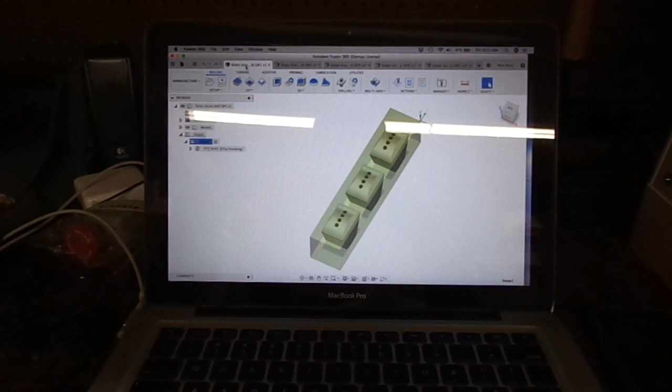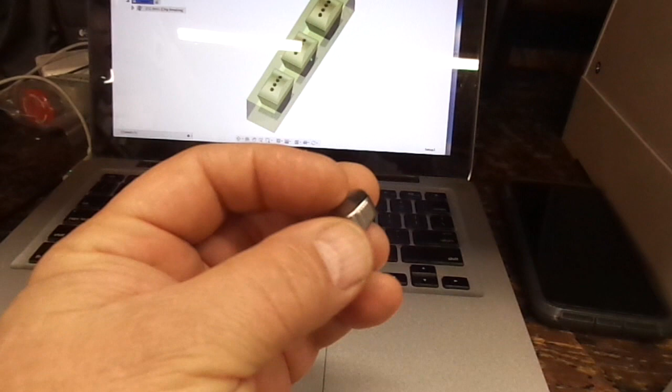So today's little project is going to be some air conditioning control knobs for the 67, 68 Camaro. And the problem is the customer wants to nickel them, and these are plastic, and even the reproductions that you buy are all plastic. So for nickeling you really need the metal knobs.

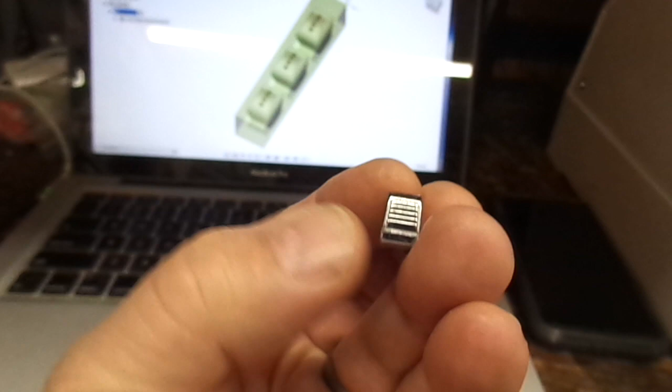So we don't have to replicate exactly what we see here, just pretty much, because there's a few angles that would be kind of time consuming. We're not going to do this little facet here, and this is at a slight angle side to side, and we're not going to cut that. It's just going to be straight perpendicular to the back.

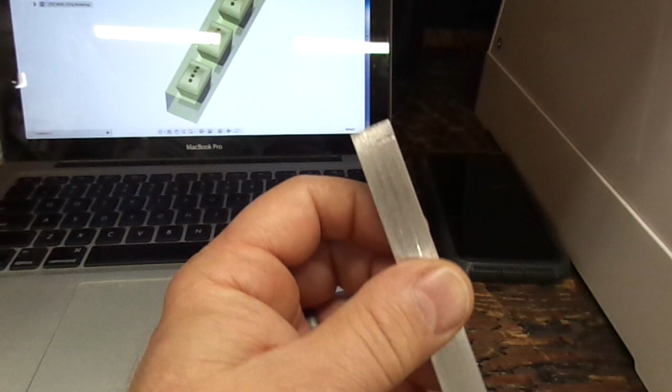So the material here is 6061 cut half by half. It's actually 500 by 510 by 4 inches.

And then on the computer, hey, there's my puppy over here.

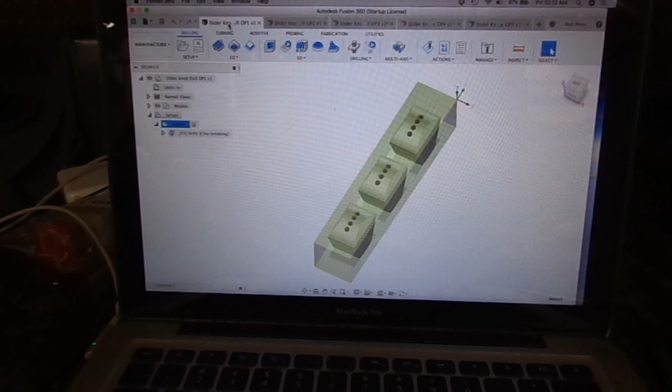And on the computer is our ops. So this is our first op. Let me get this glare out of here. Our first op is to pre-drill the holes for slotting, because they're like 3/8 deep, and clearing chips out of it's really hard. So we're going to do the pre-drill. That's a 1/16 drill bit, 4 holes in each part.

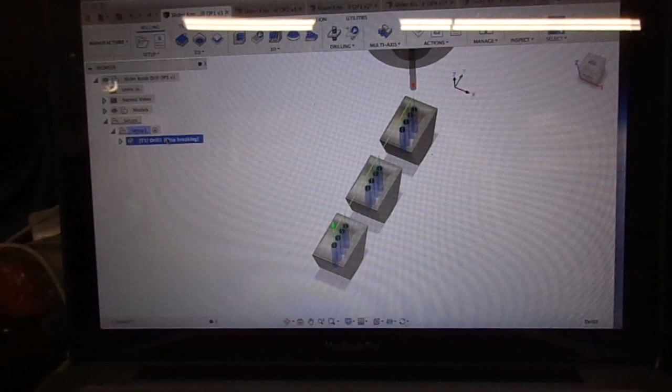And we'll go to the next op, and then these are slots, and I did multiple operations so that it would retract and go to the next one while I could blow the chips out of each one. And I've already ran this on a test piece and it works good. So there's our different slots. It goes in just a few thou at a time.

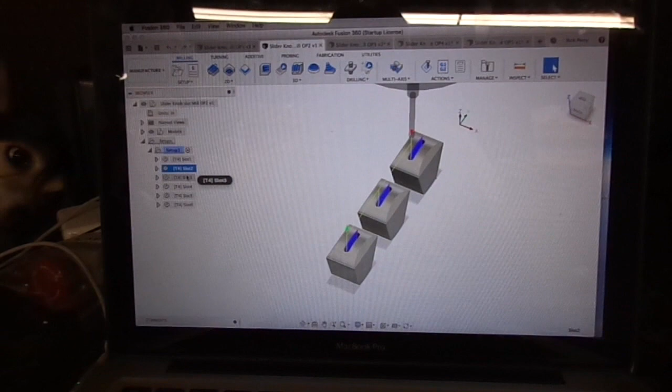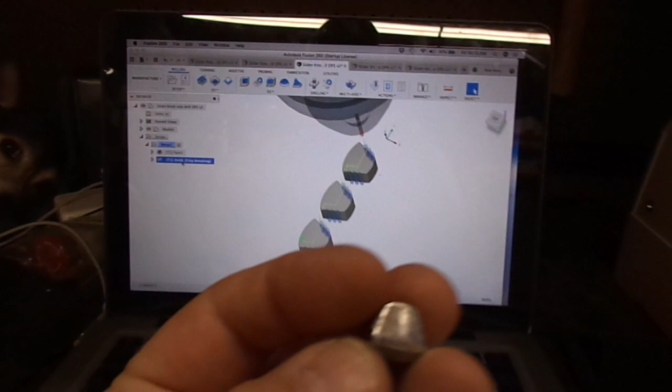Okay, so the next op is we're going to face off the top of this, which gets rid of the bulk of the material, and then we're going to come in and drill for these little features, which are sort of on the side here, but these protrude out. I'm just going to cut it in. It'll just be a little bit easier for us there.

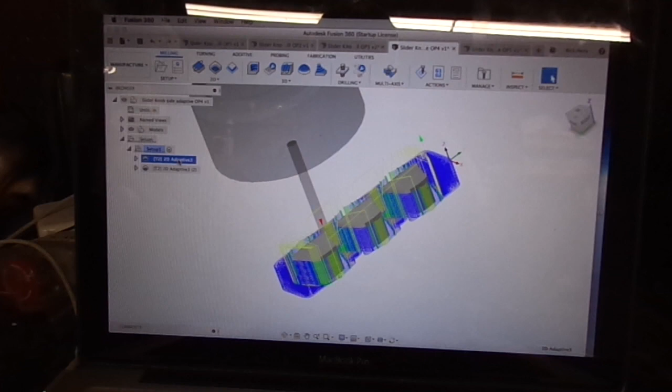And then op 4 is the adaptive. And the reason I did an adaptive is contours are kind of rough because of chip evacuation being that thick. And then we're going to do a soft jaw to separate the pieces from the stock. So then here's a last adaptive. This is like a 5 thou cleanup pass.

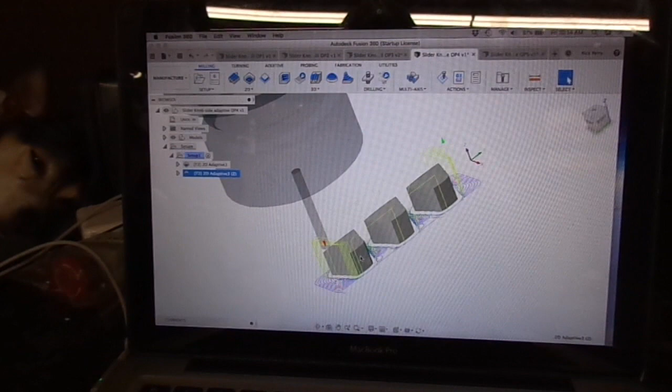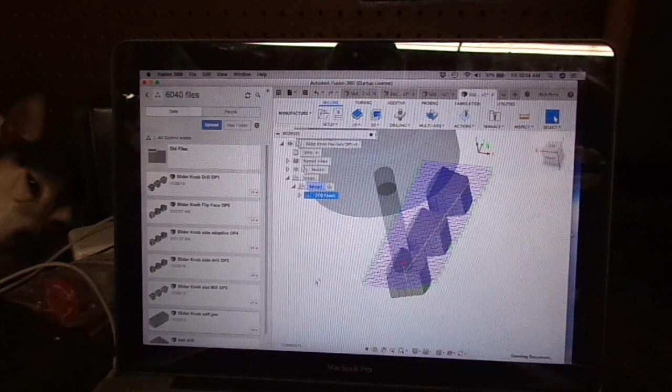And then this is the part flipped, and this is what goes in the soft jaw, and we'll face off the top. When we get the top faced off, the 3 pieces will be captured in the soft jaw. And I have the soft jaw modeled, but I haven't cut it yet. So the soft jaws that I've got in the vise right now will actually be sacrificed into making these. So in between op 3 and 4 we'll cut these.

Alright, so let me show you the vise and the setup. So here's our vise that I showed on my channel, and I bought some material and machined my own soft jaws. They had this material, but I went ahead and machined my own. So the piece is going to go in here with its 500 by 510. The 510 is going to be pointing up.

Just use a piece of aluminum here to lay against it to put the material against, because I have to flip it between the slots and the profile. So that's not a problem. And we'll get it all tightened down, get the bit in it, get the camera set up on the tripod, and we'll make some chips.

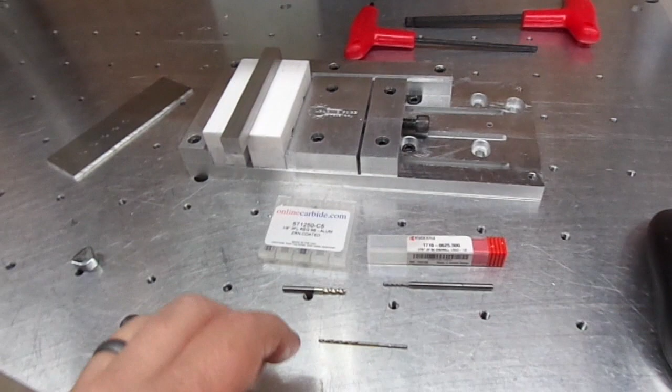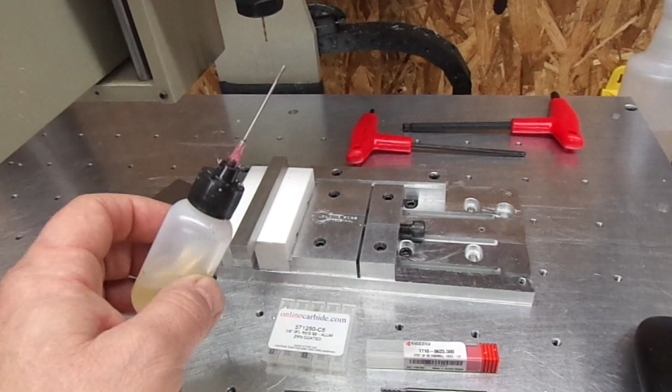So I want to go over the tooling that I'm going to do this with. The 1/16 hole is a Harbor Freight cheap, I forget what this coating is, but anyway, it's the Harbor Freight cheap bits that you get a pack of 10. These ended up being the best bits for drilling these holes, because I have to drill really deep in here, and you'll see when I'm drilling I'm actually going to use the little dropper to apply the WD-40 and to pull the little strings of aluminum off. You can see it's all around the tip here from testing.

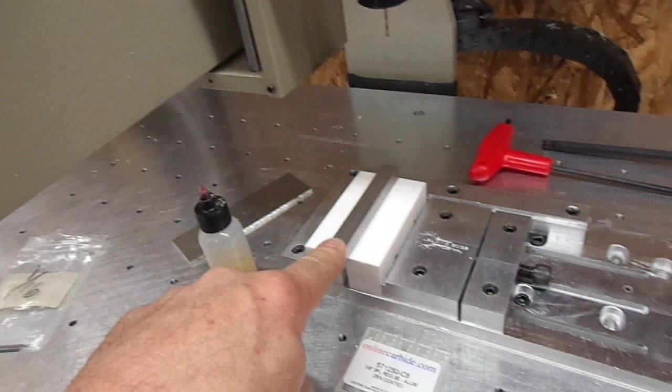So the way that I was able to drill into these safely this deep was the bit comes in, it cuts 5 thou, backs off to break the chip, 5 thou, comes back in and cuts another 5 thou, then fully retracts and comes back in and does that until it gets to full depth. And I can probably be a little more aggressive, but that seemed to work the best to get all of the chips out of the hole.

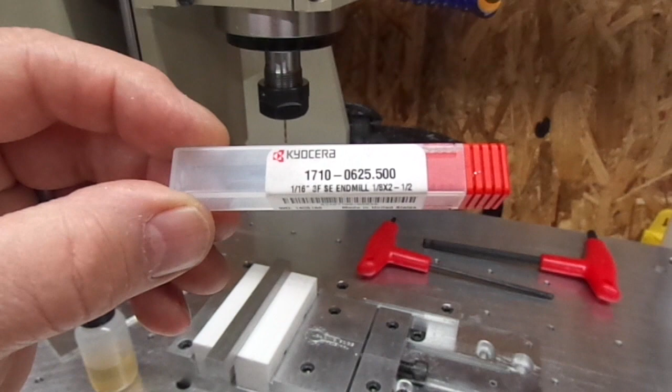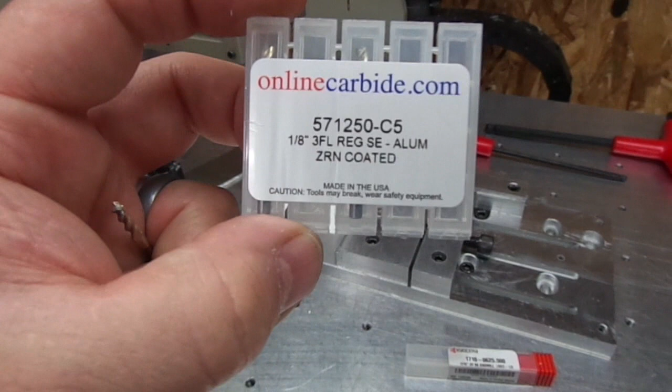And then I'm going to come in with, this is the end mill. It's a Kyocera 1710-0625.500, so it's a 1/2 inch long 1/16 end mill, 3 flute. So this is the end mill that I'm going to use to cut the slots. And then for the adaptive, this is my eBay onlinecarbide.com 1/8 inch 3 flute ZRN coated. You've seen me use this bit before, so that's what we're going to do the adaptive with.

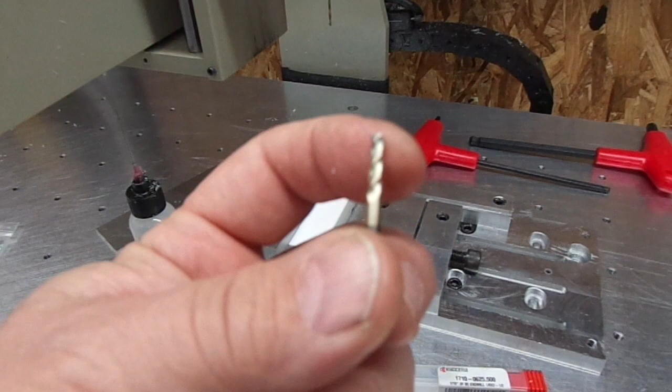And then what I don't have in front of me is the same thing as this 1/8 inch, a 1/4 inch 3 flute that I'm going to do the facing with. The facing on the first side, and when we flip it, cutting the back side with just a 1/4 inch end mill. So that's the tooling setup. So let's get ready to cut.

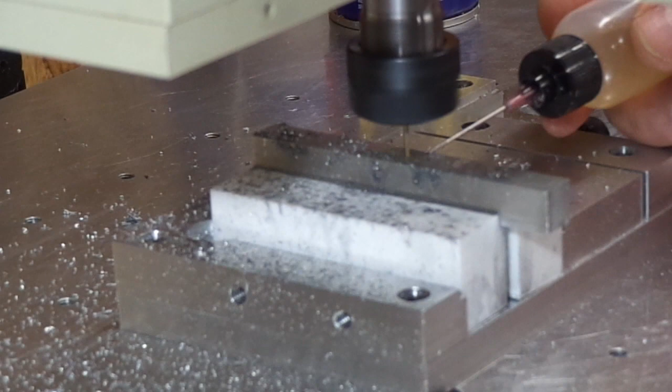So the previous operation we drilled the holes, and you could probably be real careful and mill these slots without drilling the holes, but that gives us room for the material to drop down into when we're milling, and there's less chance of breaking the end mill. So with this one we're going to slot these holes out, and I'm going to use an air gun, and I'm going to blow in between passes, blow the chips out, as well as adding the WD-40.

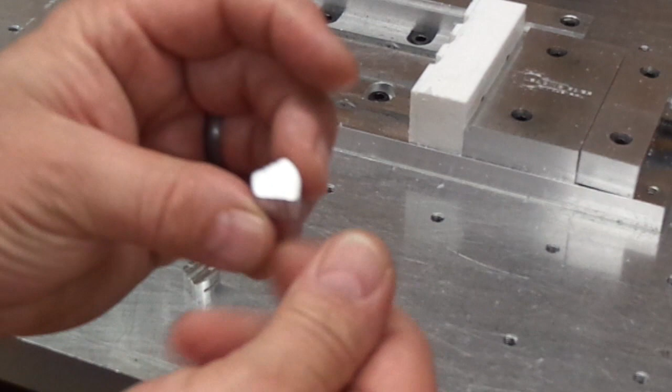Alright, so here's our piece off the table. No finishing has been done yet. Still got a little edge there. I'll take some 220 and I'll put that little edge, that little brushed look on it. So here's the original plastic piece and here's the piece I made. Very similar, but this one's just custom. So there we go.